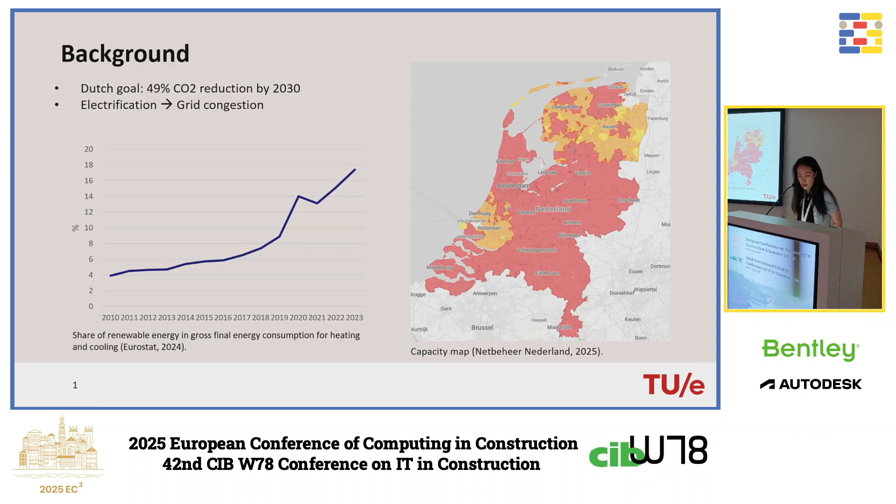Therefore, peak shaving is a hot topic in the Netherlands. As a solution, there are several strategies, such as reducing the electricity demand during electricity usage peaks. But a more common strategy is decoupling production from consumption. Especially in residential areas, energy storage systems seem like the most promising approach to be promoted in the Netherlands.

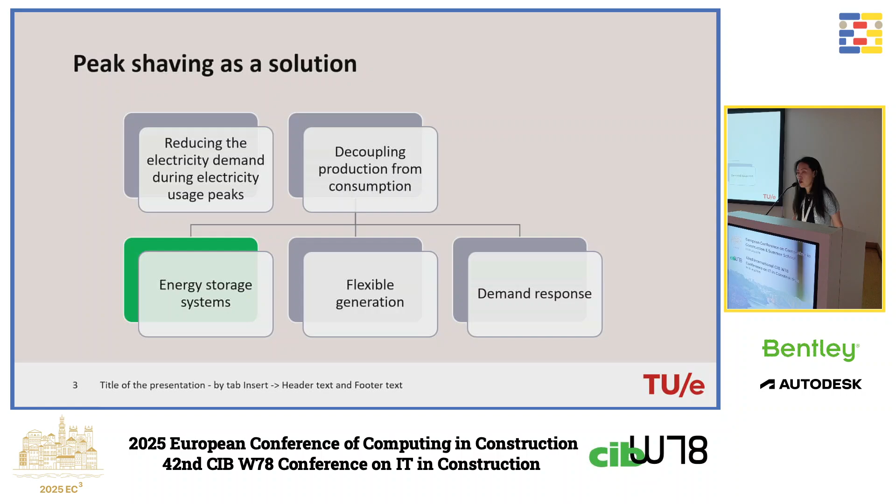However, there is no successful business model so far for each individual residential building to install an energy storage system, and the government would not prefer that direction and would like to promote energy communities in order to have collective storage systems, which are more sustainable from a long-term profit perspective and offer systematic benefits at a neighborhood level.

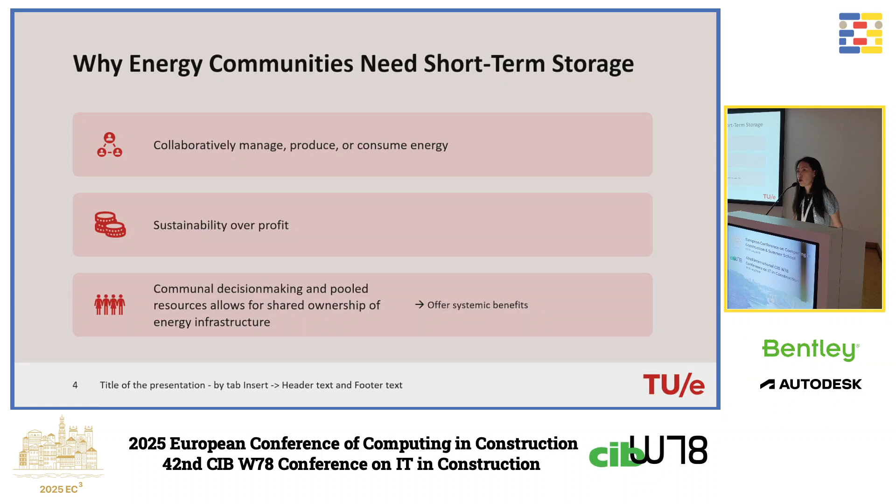Therefore, this study's main research question is how to design and develop a decision support system for the energy community to guide them in selecting the appropriate storage solution.

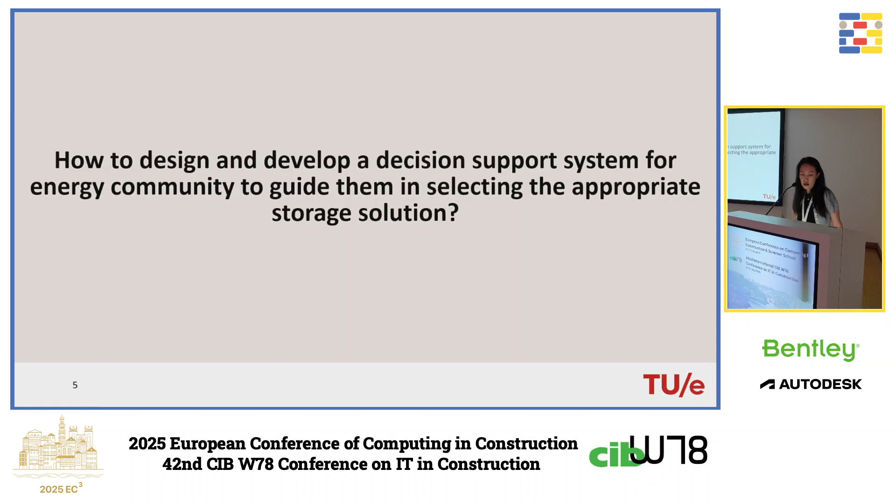We follow the design science methodology approach, which has 3 key steps. It also has iterative loops. First, to investigate the problem based on a literature study and interviews with the relevant stakeholders. The second is development. In this case, we are integrating the simulation and the Excel tool development together. The third is tool validation, with interviews done to check the system's usability with the system usability scale.

So after the interviews with the relevant stakeholders in the Netherlands, including the grid connectors, grid operators, the electricity producers, and also the government and the energy community stakeholders, we found that so far, despite the technological advancement, stakeholders still lack efficient decision support systems to guide them in selecting the most appropriate storage solutions.

Especially in 2 perspectives they are lacking. First, they lack sufficient incorporation of demand side knowledge. And secondly, as you can imagine, energy communities lack sufficient technical support to understand the key performance and especially how their peak will be shaved, the peak shaving potential at a neighborhood scale. So therefore, in this study, we're particularly targeting these 2 problems, and developed a system architecture for the decision support system to tackle them.

So the upper part is about the demand simulation layer. I think you already heard many presentations in this conference about building information modeling to energy information modeling, etc. We took a slightly simplified approach to integrate the meteorological data, the weather data, the building information data, and also the occupant behavior data, in this case deterministic occupant behaviors of profile personas in the Netherlands, into the energy demand simulation.

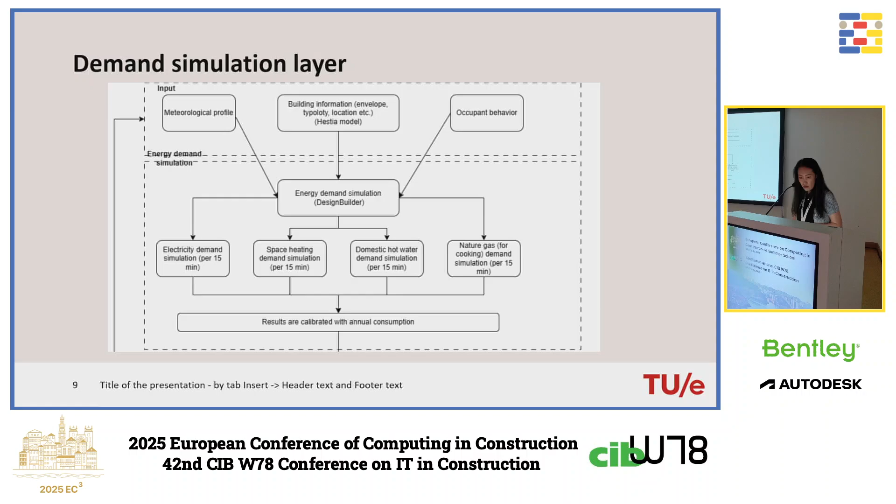We used DesignBuilder here and simulated the demand at the household level. And we also calibrated the results based on the annual data. The second part is interaction with the end users. Here the stakeholders of the energy community are the users, and we tried to present things at a level that they could easily understand.

So we allow them to give additional input to select what kind of house they have, what kind of profile of household they are. And we also try to explore whether there is a possibility they can input smart metering data. Of course, there are privacy issues; that is a big challenge.

And after the results built on our demand simulations, we store them in a knowledge base, and then we integrate it in the integration layers and make analytic engines to have combined models for the thermal energy storage solutions and also the battery energy storage solutions models, and to present them as figures to show them the final results, to help them understand what's the potential of the peak shave.

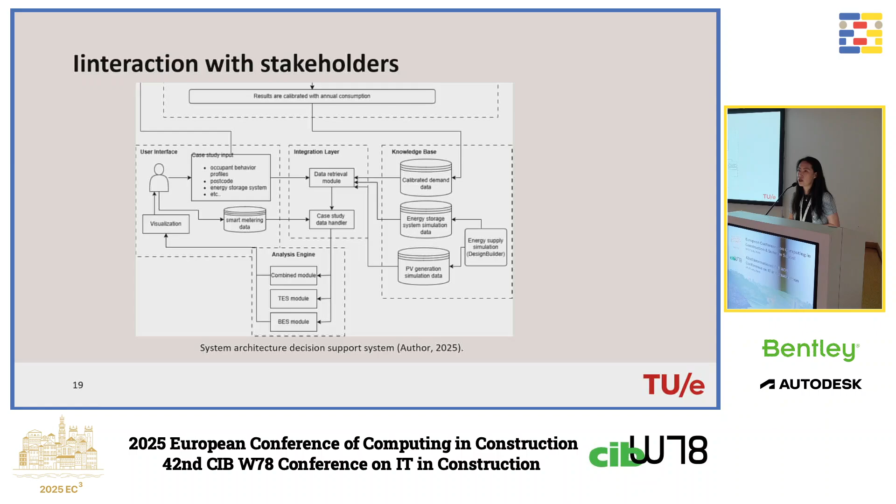As a demonstration, we use a case study in Eindhoven to demonstrate how this decision support system works. And we selected one area based on two main criteria. First of all, the area has more ownership of the houses. And secondly, the energy label should be around rated C or lower, which means that they have a high potential to do renovation of their households. And we selected an area in the south of Eindhoven.

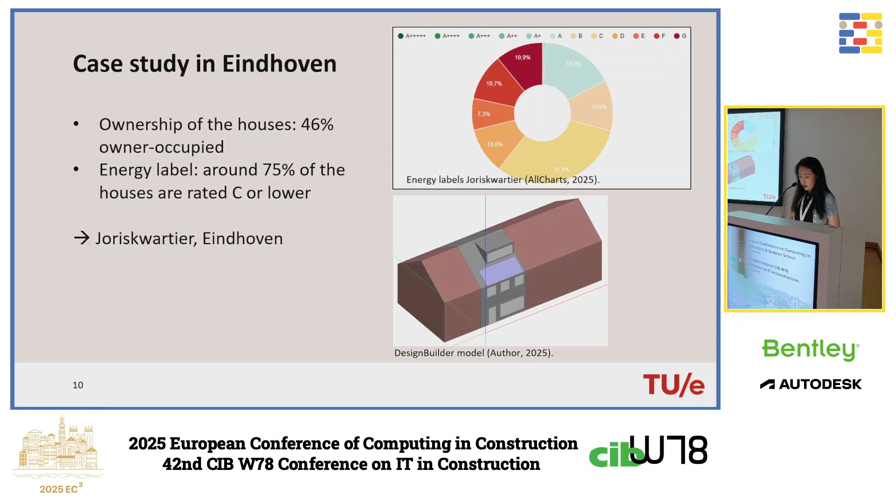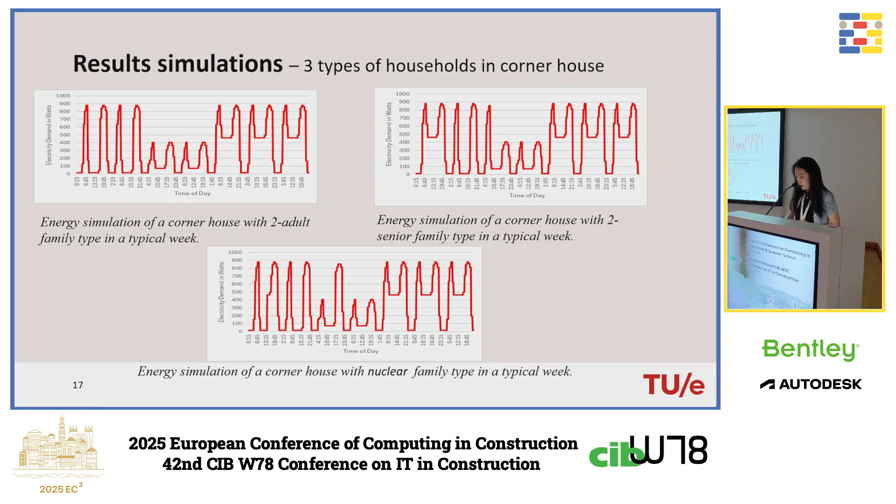For demonstration purposes, we use 3 types of households living in corner houses to simulate their energy demand, which are the corner house with 2 adults, 2 seniors, and also nuclear families. And we also simulated their PV generation for a typical winter week and also a typical summer week.

We tested 3 lithium battery scenarios using this system. The first is a moderate peak shave scenario, which also has 2 sub-scenarios with different storage efficiency: one is 85%, one is 80%. The second is a more aggressive peak shaving scenario that aims to shave the peak to reach a lower baseline power, and faster. The third one is a conservative peak shaving scenario with a higher baseline power and also relatively low discharging power.

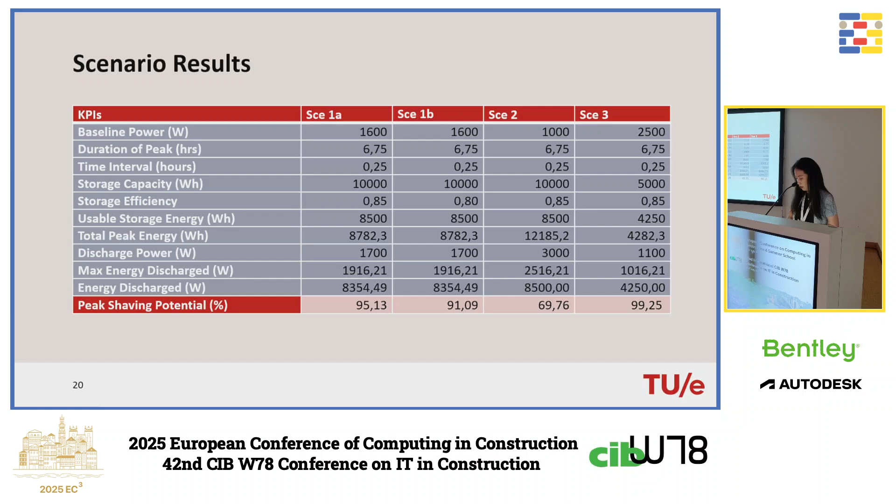And we demonstrate the scenarios with a table, but also with figures in the paper, and we found that the storage efficiencies do have an impact on the peak shave potential in total. And, of course, as we expected, the conservative peak shaving strategy could lead to more peak shave potential in this case, which is quite consistent with what we expected.

This is the user interface that we developed in the end with Excel. On the left side, this is a case study where the users, the stakeholders, can put in their information according to their neighborhood or energy community, including how many corner houses, how many attached apartments or terrace apartments with different types of households. And they can also indicate how many solar panels have been installed in their neighborhood. They can select a day of the week or also the seasons to explore the different scenarios of the peak shaving.

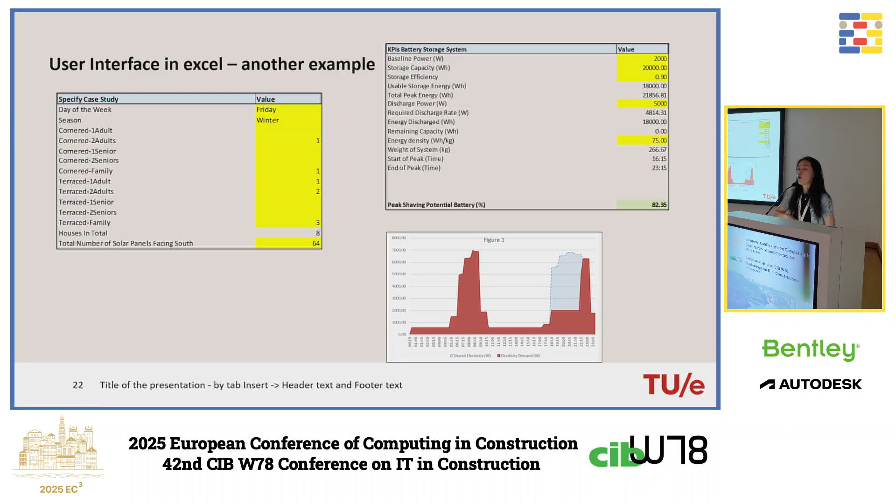On the right are the KPIs that most likely they receive from the energy storage technical companies, which give them these indicators about different energy storage KPI situations. Then they can explore, based on these indicators, what the peak shave potential in their neighborhood would be. And on the bottom right, there are figures where we demonstrate to them, for example, the blue part is the shaving potential of the peak. We particularly focus on the evening peak.

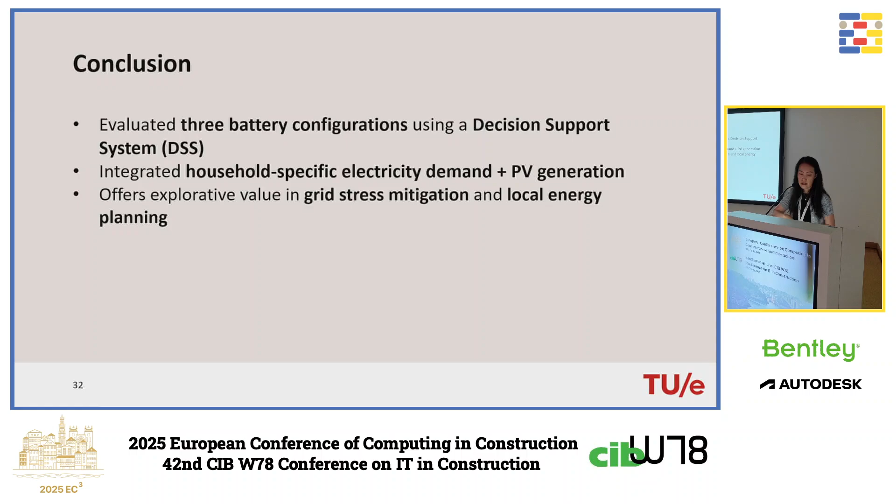So in the end, a short conclusion here: the two problems that we tried to investigate in this research, we basically achieved. We integrated the household-specific electricity demand and also their PV generation into this decision support system. And we evaluated these three battery scenarios and offer explorative value in grid stress mitigation and local energy planning.

Of course, we have to acknowledge quite a lot of limitations for this explorative research so far. We have simplified the load profiles, and heating and cooling demand has not been fully integrated in the scenarios, because the future off-gas scenario in the Netherlands would lead to more options that we have not explored yet. And also we need to scale up this decision support system to a larger neighborhood and a longer time frame to test whether it still works well.